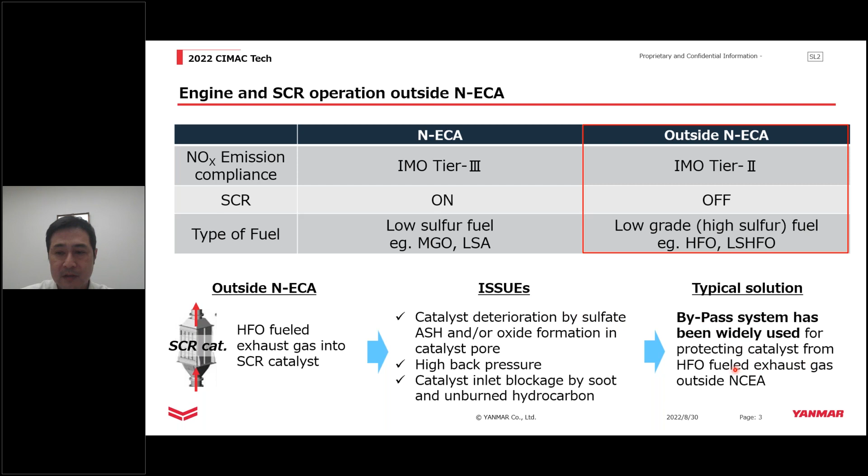If the SCR catalyst is exposed to HFO fuel exhaust gas, the catalyst is deteriorated by sulfate ash and oxide formation in the catalyst pores. In addition, fuel consumption is worsened due to high back pressure. So the typical solution for dealing with this issue, the bypass system, has been widely used for protecting catalysts from HFO exhaust gas outside NECA.

The bypass operation practice requires a way for the exhaust gas to bypass the catalyst reactor. This doubles the amount of piping required, making it more difficult to install in ships with multiple engines. To address this, Yanmar set out to reduce the total system size by making the bypass channels smaller, devising the integrated bypass and catalyst reactor unit shown here.

This makes it possible to make the system more compact while maintaining the advantages of the bypass method, such as long catalyst life, low back pressure, and redundancy.

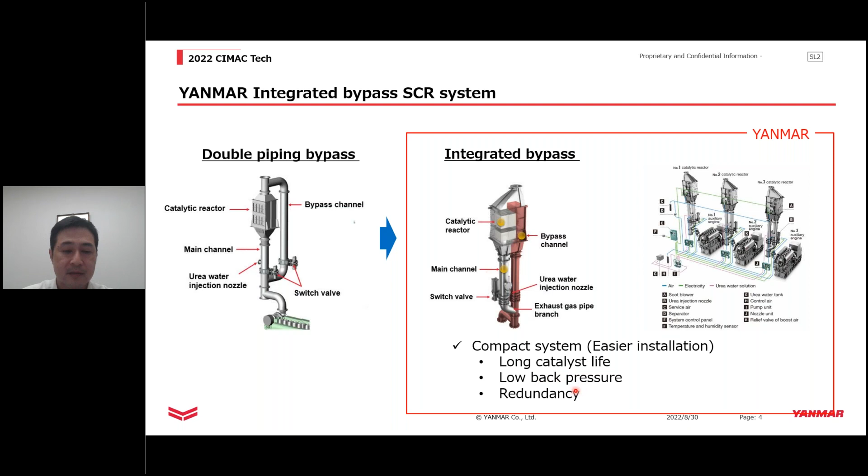However, the SCR catalyst deterioration during bypass operation with integrated SCR system occurred during the development phase. We reported this issue in the CIMAC 2019 paper. However, Yanmar did not report the catalyst deterioration mechanism in detail.

That deterioration was caused by exposure of catalyst to high sulfur HFO exhaust gas under mid or low temperature conditions, around 100 to 200 degrees C, with almost no gas flow. The possible catalyst deterioration mechanisms during bypass operation are three: ammonium bisulfate formation and metal sulfate formation, and corrosion and

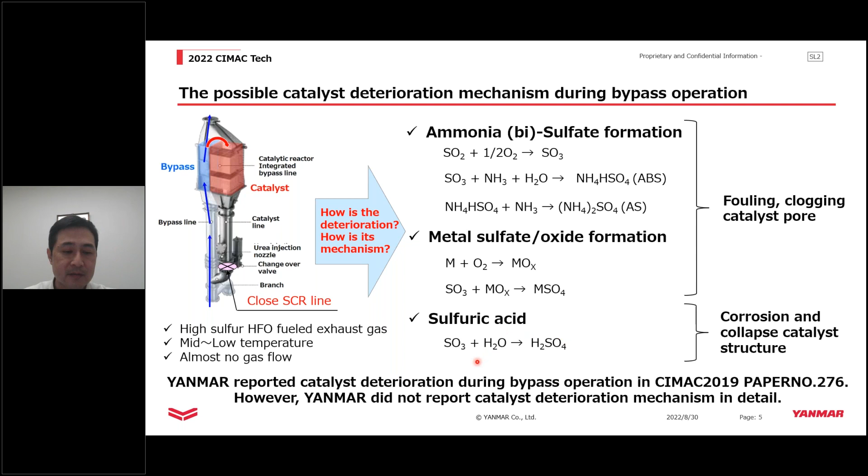collapse of catalyst structure by sulfuric acid. In this presentation, I will present the main root cause of the deterioration during bypass operation in detail.

I will explain the onboard ship test condition. Onboard test was conducted to check catalyst deterioration under actual use bypass condition in an ocean-going vessel auxiliary engine. SCR operations and the tested SCR system are shown here. The engine was started and stopped several times according to ship power generation demand. Fuel for bypass operation was HFO, and the total bypass time was 6 months, with fuel type HFO.

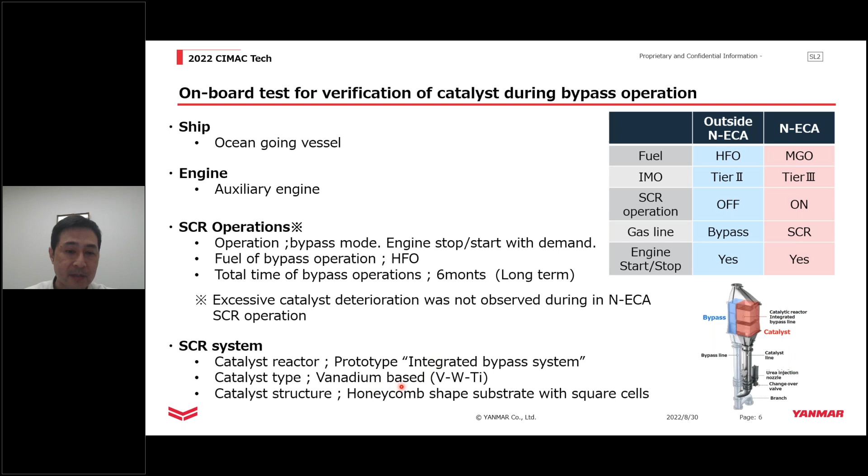The reactor was a prototype integrated bypass system with vanadium-based catalyst, honeycomb-shaped substrate with square cells. The NOx conversion tests were done on small core samples which were picked up from the ship, as shown here. The ship-tested catalysts were installed in 2 layers: the first layer upstream close to the engine, and the second layer downstream. The samples were labeled first upstream, first downstream, second upstream, second downstream, in order from the upstream side closest to the engine.

NOx conversion check was done by the synthetic gas test bench. Here shows a schematic diagram of the synthetic gas test bench. The testing conditions are shown in these tables. The checked samples were 5 samples, including fresh and aged, from 6 months of bypass operation. The synthetic gas test reactor space velocity condition was 30,000 and ammonia ANR was 1.

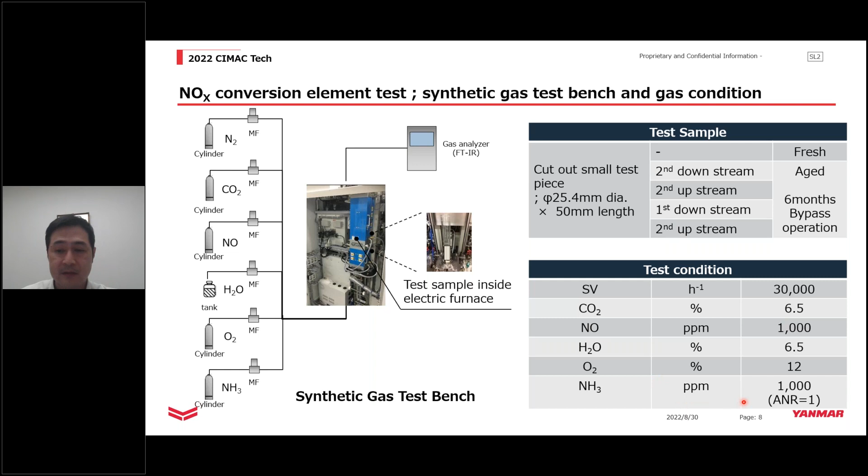Here shows the NOx conversion result. Please see the right-hand side. The vertical axis shows the fresh and aged sample locations from upstream, and the horizontal axis shows the NOx conversion at 200 degrees C and 250 degrees C with ANR1 at space velocity 30,000. Comparing to the fresh catalyst, the second layer NOx conversion was severely deteriorated.

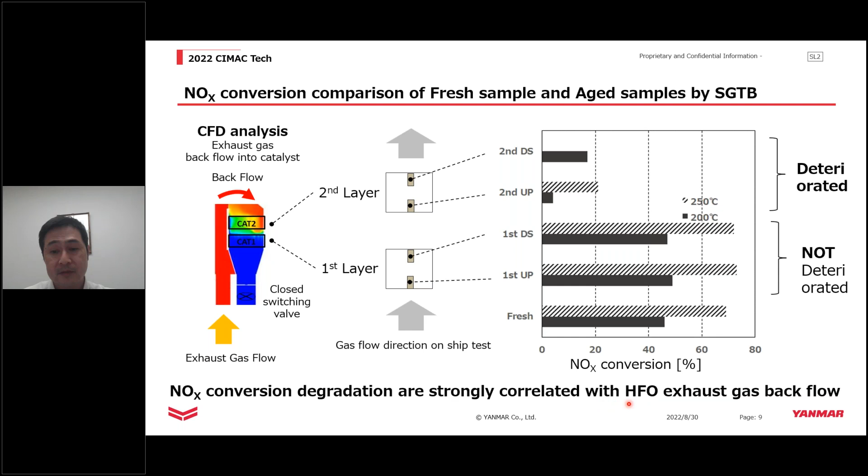On the other hand, the first layer sample was not deteriorated. CFD simulation shows exhaust gas flow backflow in the second layer catalyst. Considering the CFD result, NOx conversion degradation is strongly correlated with HFO exhaust gas backflow.

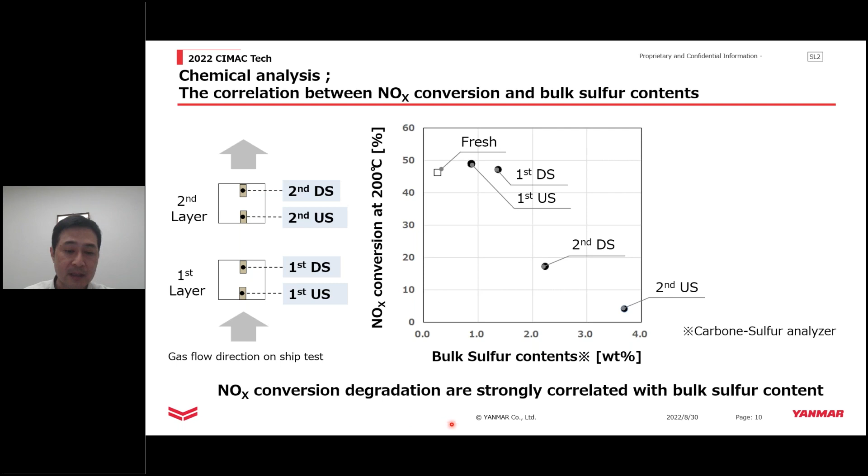In order to check the possibility of ammonium sulfate formation, the amount of ammonia ion adhering to the catalyst was analyzed. Analysis was conducted by ion chromatograph measurement of aqueous solution after washing the sample. The horizontal axis is ammonia ion concentration after water washing. As you can see, there is no correlation between NOx conversion and ammonia ion concentration. This indicates that ammonium sulfate or bisulfate formation is not the main root cause.

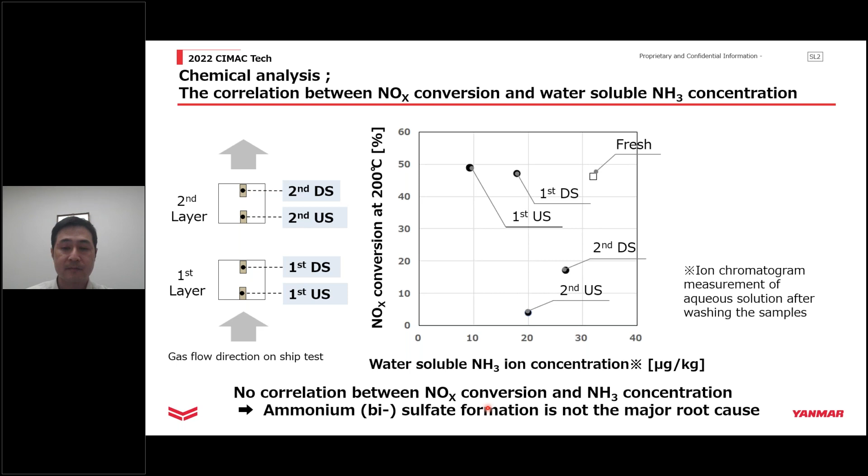Next, adhesive metal components analysis was conducted using FE-EPMA. The vertical axis is the relative difference amount in adhering metal components. If this relative value is greater than 1, it indicates that adhering deposit is increased. Sulfur and oxygen increased, but there was no significant increase of components containing HFO ash such as calcium, silica, and vanadium. From this result, clogging of catalyst pores due to sulfate ash such as calcium sulfate may not be the major root cause.

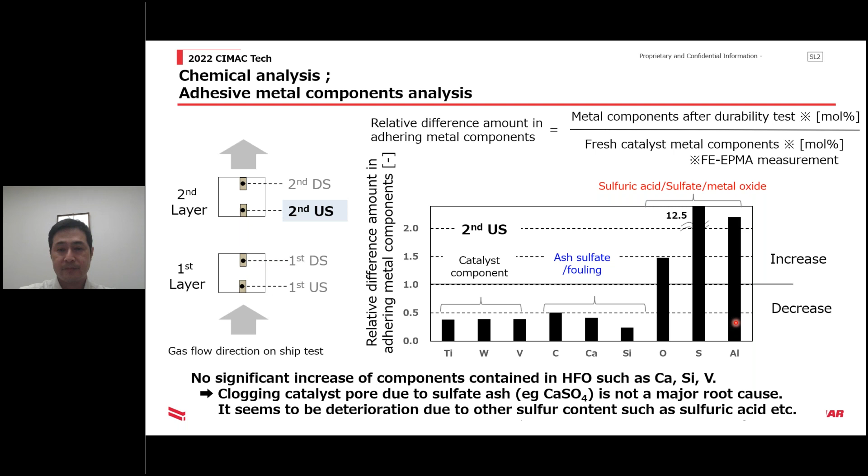Next, the degree of condition difference inside the catalyst was confirmed by FE-EPMA analysis. Here shows the fresh and aged sample vanadium and sulfur. Red color indicates high concentration and blue color is low concentration. The aged catalyst was observed to have relatively smaller vanadium amount near the surface, but the amount of change deep inside is not so large. The near-surface difference is due to the large amount of sulfur adhesion, maybe, and this indicates no big loss of vanadium metal occurred.

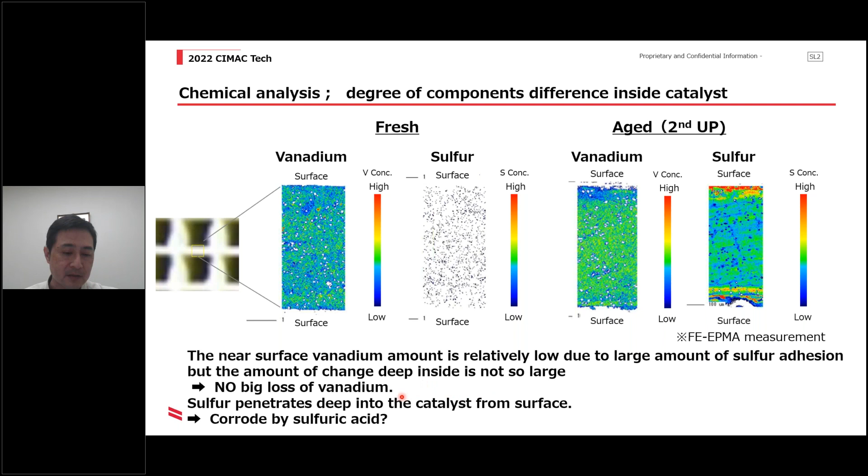On the other hand, sulfur seems to have penetrated deep into the catalyst from the surface, and it looks like there are some cracks in the catalyst. This indicates the possibility that catalyst corrosion had occurred due to sulfuric acid.

Next, a visual inspection check and the corrosion element test were conducted. The left side visual inspection picture shows elution of catalyst components in the insulation mat. Element tests were conducted to determine which sulfuric acid corrodes the catalyst. The left side picture is by diluted sulfuric acid, and the right side picture is by concentrated sulfuric acid. The catalyst was found to corrode when exposed to concentrated sulfuric acid.

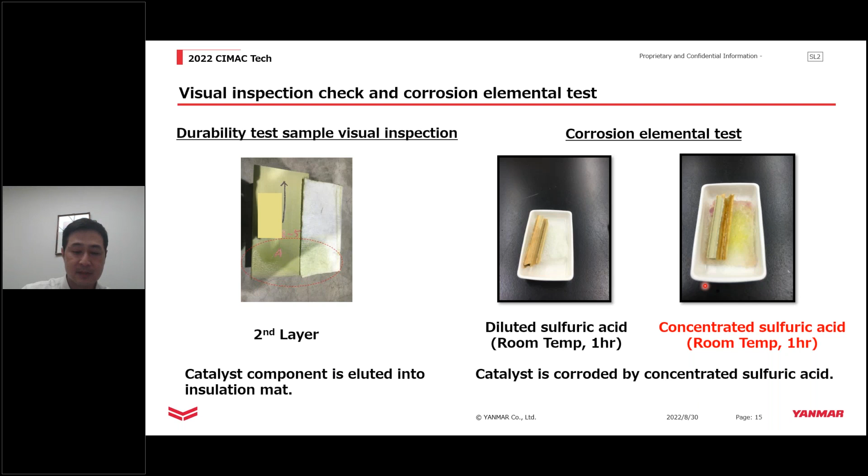Based on this result, the assumed catalyst deterioration mechanism during bypass operation is shown here. Ammonium sulfate formation and metal sulfate and oxide formation are not the major root cause. The corrosion of catalyst by sulfuric acid may be the main root cause.

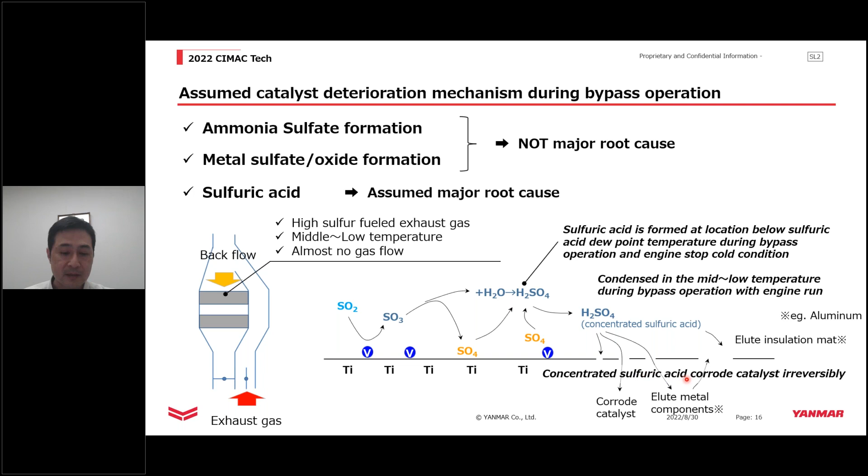The assumed mechanism is as follows. First, sulfur and SO2 is oxidized to SO3 on the vanadium metal. Then sulfuric acid is formed at locations below the sulfuric acid dew point temperature during bypass operation and engine stop condition. The sulfur is then concentrated to concentrated sulfuric acid in mid to low temperature during bypass operation with engine run. Finally, the concentrated sulfuric acid irreversibly corrodes the catalyst and the insulation mat.

Yanmar took countermeasures shown here based on the deterioration and mechanism understanding to prevent the irreversible catalyst deterioration by backflow. The reactor structure was optimized by adding a perforated metal plate to minimize backflow, and the purged air control was optimized to minimize the backflow.

We also optimized periodic valve opening during bypass operation to purge sulfur using exhaust gas heat, preventing concentrated sulfuric acid formation.

So here is our conclusion. In long-term bypass operation with HFO, irreversible catalyst deterioration was observed that caused severe NOx reduction conversion degradation. This was caused by concentrated sulfuric acid corrosion. Yanmar has succeeded in optimizing the bypass integrated reactor structure and controls based on this mechanism understanding.

Yanmar has delivered more than 1,500 SCR units into the market. We think SCR will continue to be an important technology for decarbonized fuel ships. Yanmar will continue to improve our SCR in order to provide customers with the best solutions. So that's all. Thank you very much.

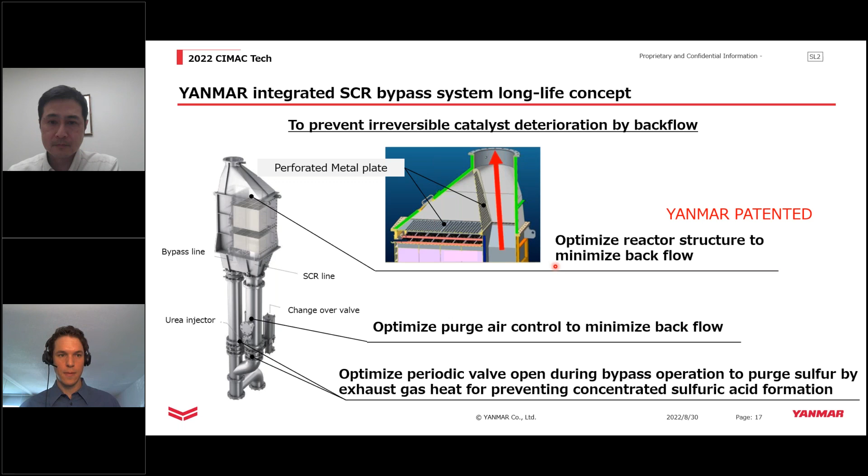Let me confirm your question clearly. So the countermeasures today are perforated metal plates and regular heating of the catalyst. Yes, but did you also consider other measures, such as actually going for an outlet closing valve?

So basically we use perforated metal and optimize the valve control, and sometimes we have the option for a closing valve at the outlet side, depending on the customer's demands.

Okay, thank you, so it is there as an option. Maybe also, as you observed sulfuric acid-induced corrosion of the catalyst, did you also see issues with the reactor itself, as part of the reactor is cold? The steel corrosion? Still, no, we do not see that critical corrosion in our systems in the market.

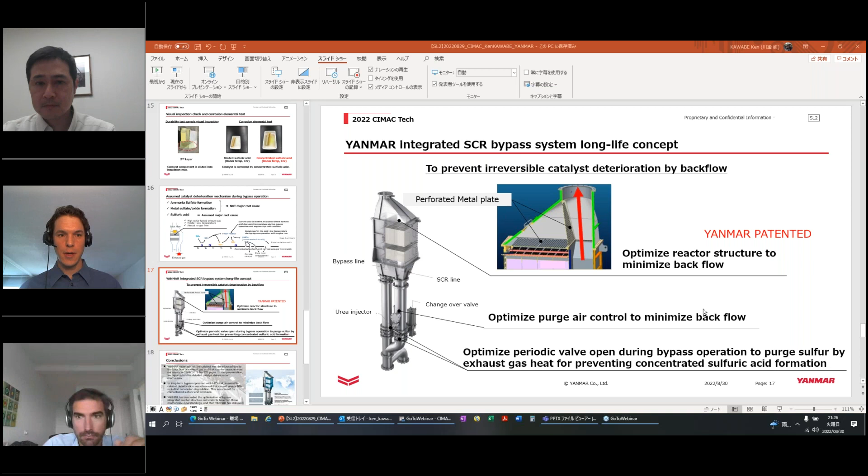So then I would like to move over to our next speaker, which will be Panagiotis Ketatos, and he will be presenting the concept of advanced SCR control by utilizing virtual sensor concepts, where the state of the SCR catalyst can be fed back also to the engine operation. And this very advanced and promising SCR and engine control system has been investigated together with the Paul Scherrer Institute as an academic institute. I would like to give the stage to Panos, please.

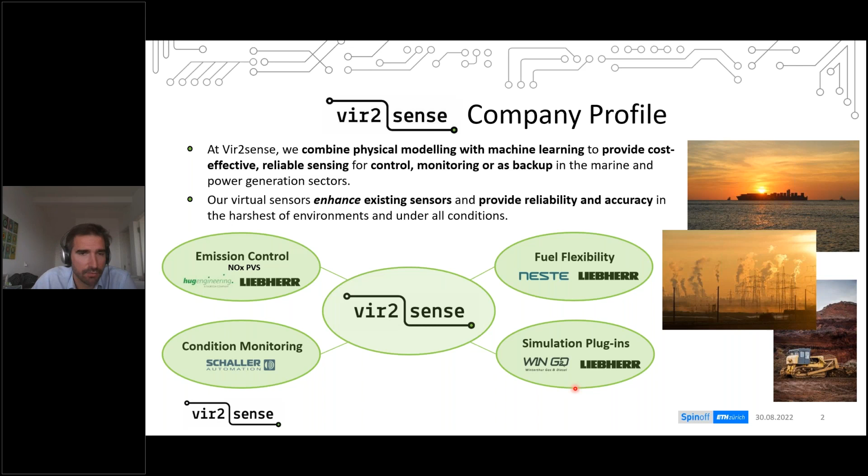Looking into fuel flexibility and controls for fuel flexible engines, condition monitoring of components on the engines, and providing simulation plugins for engine design and optimization. So this was a brief overview, and jumping directly into the main content.

So to introduce a bit the problem that we're trying to solve with this project: most modern engine installations require an SCR catalyst to reduce engine-out NOx emissions in order to comply with environmental regulations, which are becoming ever stricter. The SCR system is a very effective way to lower NOx emissions, and it can typically lower well above 90% of the engine-out NOx emissions in the after-treatment, using precise dosing of a reducing agent, typically urea, which is converted into ammonia in the catalyst and in the exhaust.

So traditionally in all marine and many stationary applications, the control of the urea dosing is based on what we call a static map, which is a map of dosing of ammonia or urea depending on engine speed and load. Although this is a very simple and well-trusted system, it's very effective, and it's also easy to check for compliance. The downside is that when using such a system, it's not necessary that engine and SCR are very well optimized together.

This can also have very bad effects during the transient operation of the engine, where jumps in NOx emissions or temperature can lead to high slip of ammonia or high NOx peaks in the exhaust. A typical example of how this is bad is in marine applications, where typically the engine will be a tier 2 engine, specifically optimized to not run with an SCR system. We then couple it with an SCR system to make it a tier 3 engine, whereby the NOx reduction required is closer to 60%, far below the capacity of the SCR. So we lose the capability to optimize the two together, which leads to excess fuel consumption, since the engine is detuned from its optimal point in order to achieve tier 2 by itself.

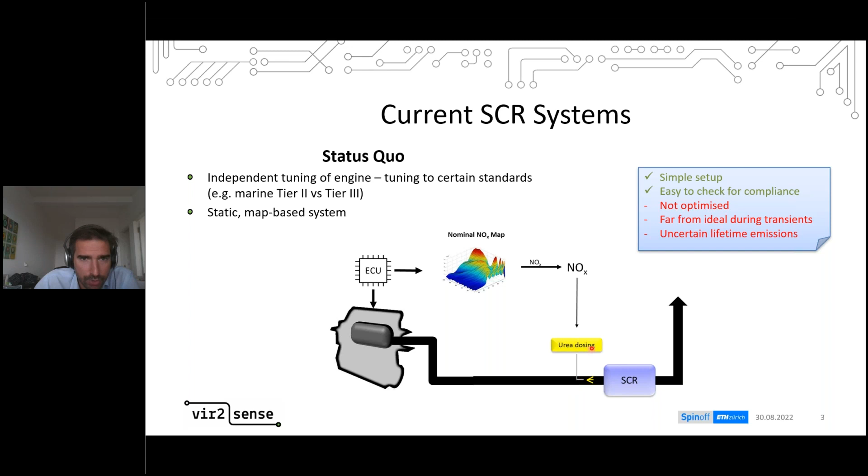So how are we trying to solve this? In this project, we try to explore the capabilities of combined fuel consumption and emission reduction using a combined SCR engine control system. The final result is what we call intelligent SCR, and it involves two parts. One is the optimization of the engine to be matched to a specific catalyst. The second part is the active control of the maps on the engine in order to fit the operation of the real-time state of the engine and the SCR, to reduce any peaks that might arise because of inability to match the operation of the engine to the state of the SCR at any given point.

What we aim to achieve with this overall intelligent SCR system is three things: overall emission reduction, including CO2 and NOx emissions - that is, reduce fuel consumption and reduce NOx emissions - and be able to effectively use either smaller catalysts with the same or even better effectiveness than a bigger catalyst using intelligent control systems, or also use a less reactive catalyst. So these are the goals, and I will show you in the end how we did on this.

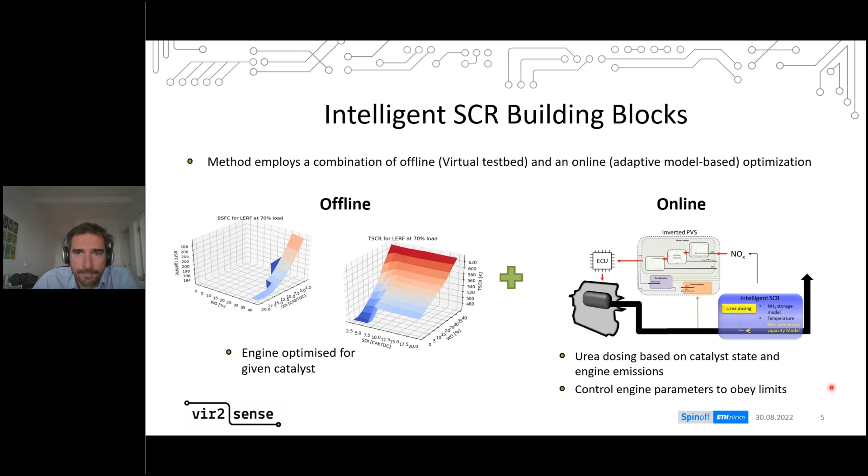For the engine part, we built a full digital twin of the engine using thermochemical models and artificial intelligence, mostly for the modeling of the turbocharger and the wastegate system.

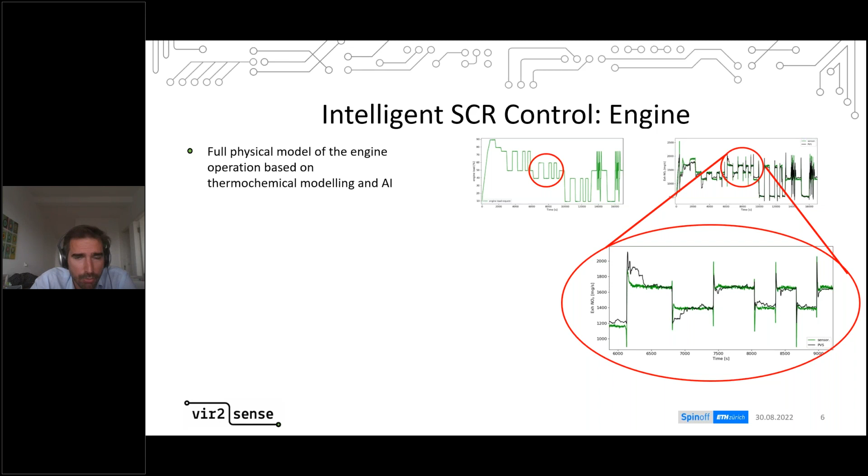For the second part, for the continuous monitoring required for the engine-out emissions in order to control the SCR, we use the Vir2sense NOx PVS, a physically assisted virtual sensor which combines the advantages of a physical sensor mounted in the exhaust and a virtual sensor running in a computer separately. During continuous operation of the engine, the virtual sensor provides a continuous NOx value, so we always have an expected NOx value from the engine, and a physical sensor, protected from the exhaust gases, samples intermittently in order to retune the virtual sensor to always have an accurate output. So we have both advantages of the virtual and physical sensor: the unlimited reliability of the virtual sensor and the accuracy from the physical sensor.

Overall, we have seen that this leads to a superior lifetime of the overall sensor compared to other systems. Typically, zirconia-based sensors in the exhaust with high sulfur fuel will last a few tens or hundreds of hours, and with our system we can extend that to a few thousand hours. So this is a big advantage.

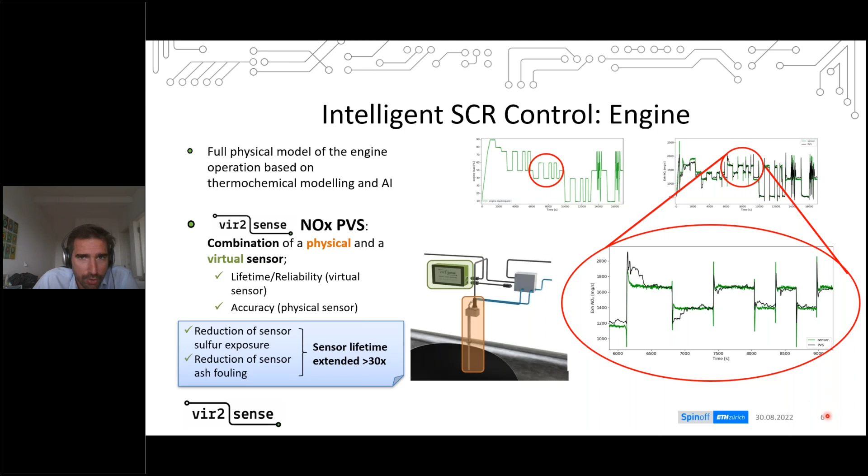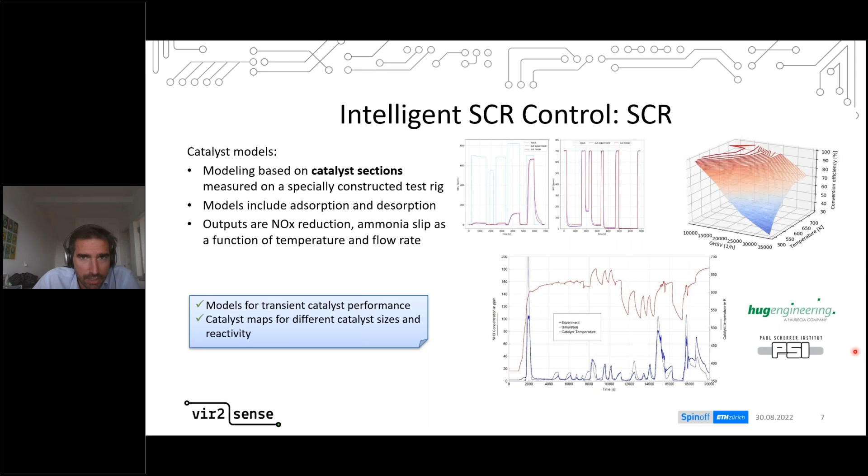And finally, to show you the test facility that we tested everything in. All the systems were tested on a large engine research facility at the Paul Scherrer Institute in Switzerland. The facility houses a 1 megawatt medium speed common rail diesel engine with a prototype 2-stage turbocharging system.

The facility has an adapted ECU in order to be able to actively change parameters. In this circumstance, we were changing start of injection to adapt the NOx fuel consumption trade-off, and the wastegate to mostly adapt peak pressure, exhaust temperature, and exhaust flow rate.

The engine and all the systems, the SCR, were tested using a standardized cycle that we created, which has specific characteristics. The cycle, you can see it here, lasts around 5 hours, and has a first section of constant loads where everything is stabilized in order to mimic stationary and marine applications. Then we have some step responses where very fast and rapid changes in load happen from one load to another in order to test the reaction of the catalyst and all the control systems.

And finally, we have a transient area where we effectively mimic the distributed power generation sector, where we have sudden load changes to follow the grid production and demand.

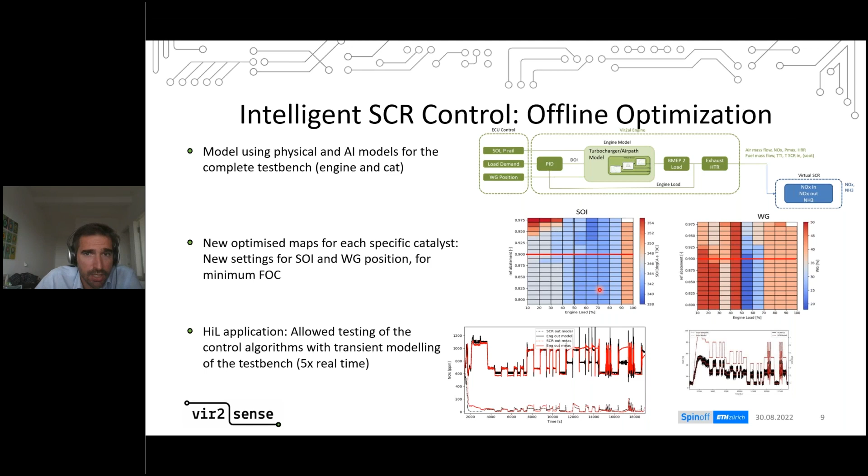We could also use this system in a hardware in the loop application to test all the algorithms that we were producing for the controls. And finally, once the offline optimization was completed and the specific maps for each specific catalyst-engine combination were available, we were also able to test the online optimization on the engine.

The online optimization essentially uses the offline maps, but also has online control loops to adapt the engine and SCR parameter maps and correct their settings by taking into account the current state of the engine and the catalyst.

As an example, we can use the cold start. During cold start, the temperature of the catalyst is low and increasing. This leads to low conversion efficiency and ammonia desorption from the increase in temperature. So during this time, the engine controller will increase the engine out NOx emissions in order to consume the desorbed ammonia, while also the SCR will limit the urea injection. So this is an effective use of this.

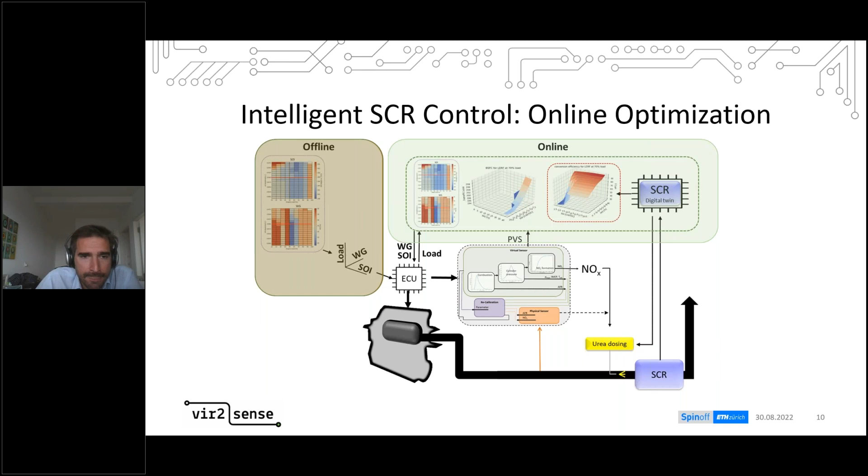And to close, to show you some results from the overall procedure and what we accomplished: we used 3 different catalysts to test the setup. The first catalyst was what we used also for the reference, and it was tested first with the standard setup of using a map effectively as a normal feed forward for the NOx and urea dosing.

And with this setup, we set it from the tier 2 engine settings to achieve 90% reduction in raw NOx, and the result was 0.46 grams per kilowatt hour of NOx after the SCR for the whole cycle, average over the whole cycle, and 6.5 ppm of ammonia slip.

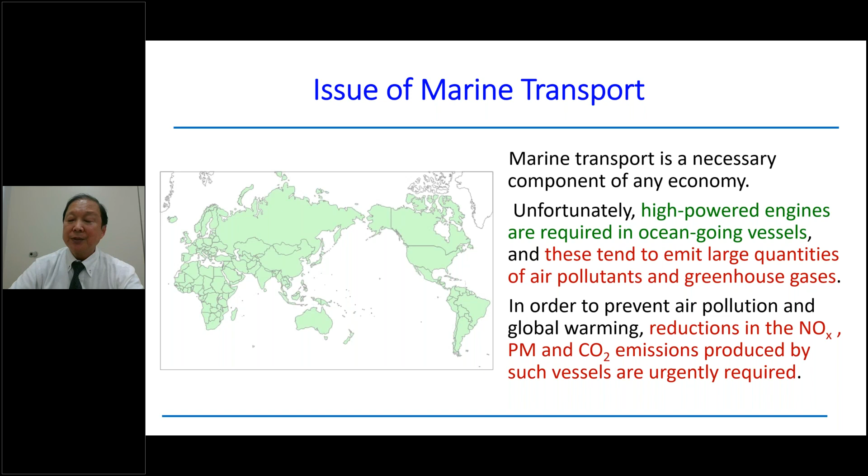Marine transport is a necessary component of any economy. Unfortunately, high-powered engines are required in ocean-going vessels, and these tend to emit large quantities of air pollutants and greenhouse gases. In order to prevent air pollution and global warming, reductions in the NOx, PM, and CO2 emissions produced by such vessels are urgently required.

Because the ice in the Arctic Ocean decreases due to global warming, the Arctic sea route is under consideration. If this is realized, the distance between East Asia and Europe will be 30% to 40% shorter, and the risk of present sea routes are reduced. For example, the risk of pirates in the Strait of Malacca, pirate risk off the coast of Somalia, and risk of travel in the Suez Canal.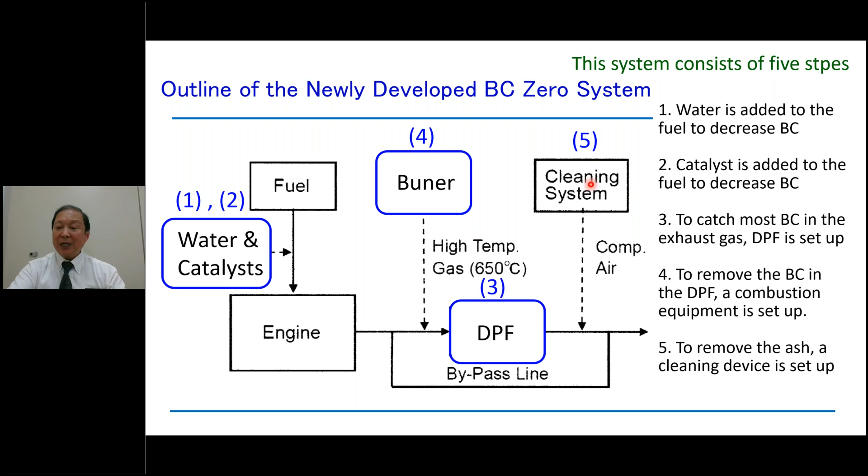This figure shows the outline of the newly developed black carbon zero system. This system consists of 5 steps. First step, water is added to the fuel to decrease black carbon. Second step, catalyst is added to the fuel to decrease black carbon. Third step, to catch most black carbon in the exhaust gas, a DPF is set up. Fourth step, to remove the black carbon in the DPF, a combustion equipment is set up. Last step, to remove the ash, a cleaning device is set up.

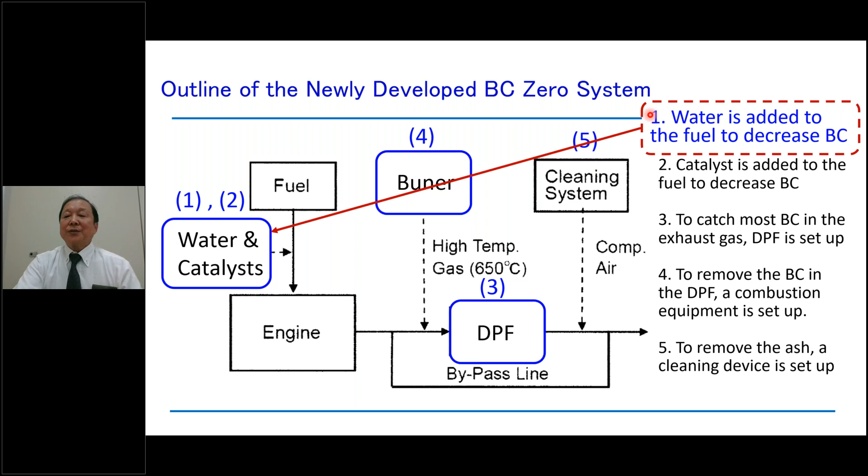First of all, I'll explain the first step. Water is added to the fuel to decrease black carbon generation in the combustion chamber during the first combustion process.

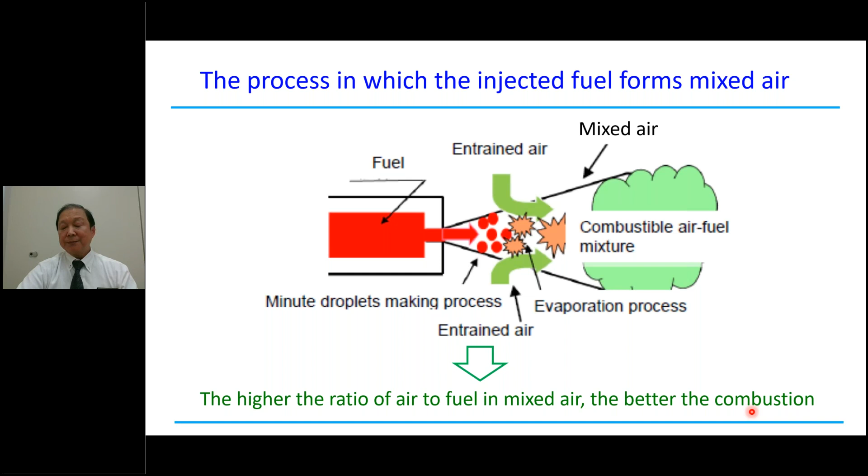This figure shows the process in which the injected fuel forms mixed air with entrained air. The higher the ratio of air to fuel in mixed air, the better the combustion. To be more specific, in the case of fuel only, the entrained air corresponding to the fuel will be introduced. In the case of fuel with water, the amount of injection, meaning fuel and water, increases as much as the water is mixed. The more the injection increases, the more the entrained air. As a result, combustion is improved by increasing entrained air against fuel.

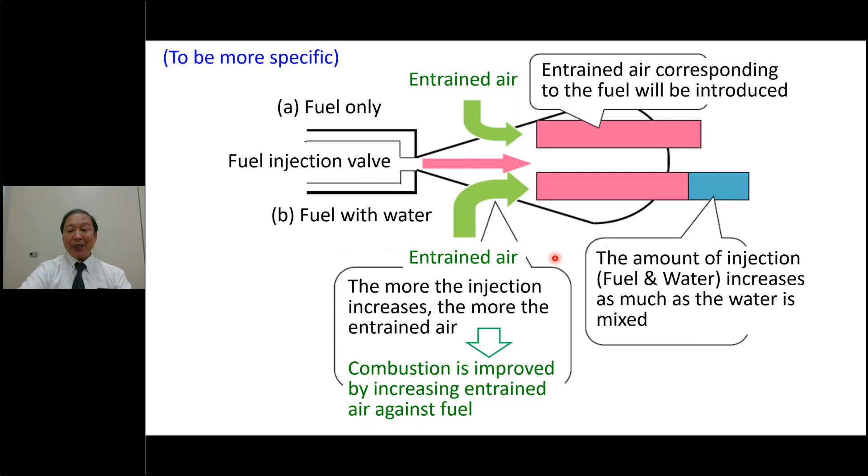This figure shows the PM reduction effect of water-mixed fuel. Adding a ratio of 15% water to the total fuel can decrease black carbon generation by about 60%. So 15% water decreases soot by 60%. Soot means black carbon.

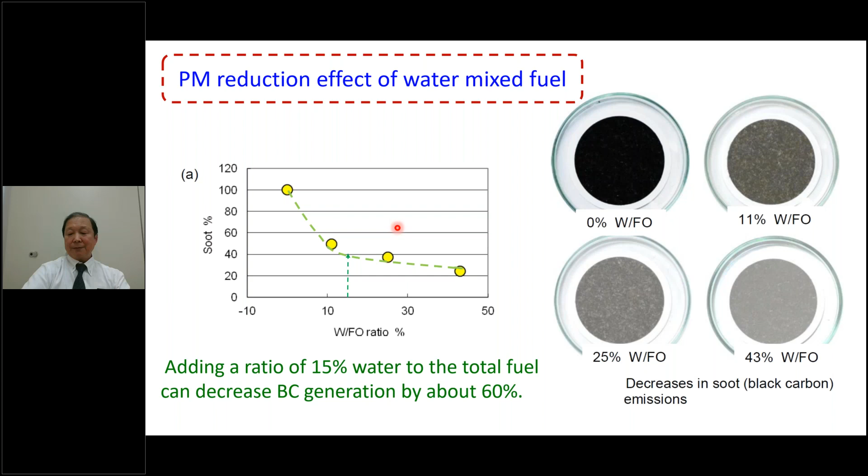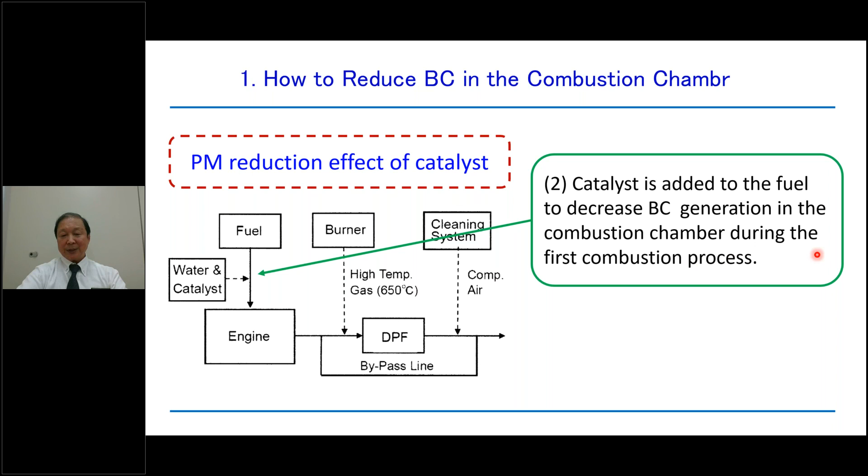This figure shows the outline of the second stage. Catalyst is added to the fuel to decrease black carbon generation in the combustion chamber during the first combustion process. This figure shows that adding a CeO2 catalyst to the fuel can decrease black carbon generation by about 20%.

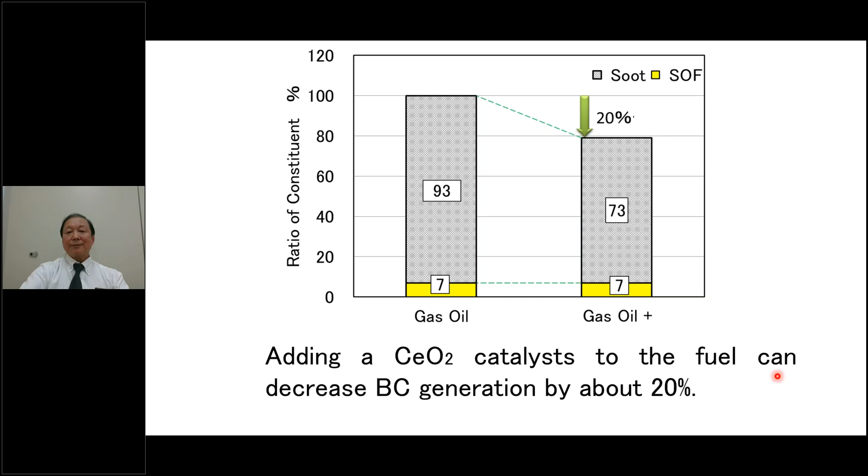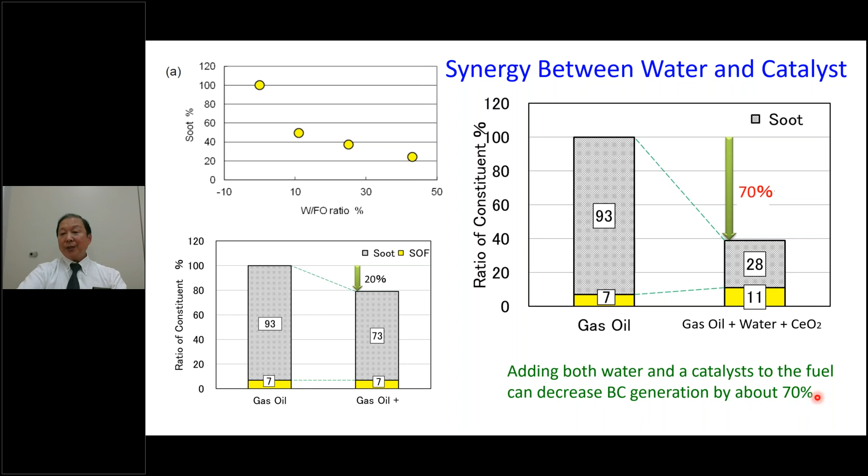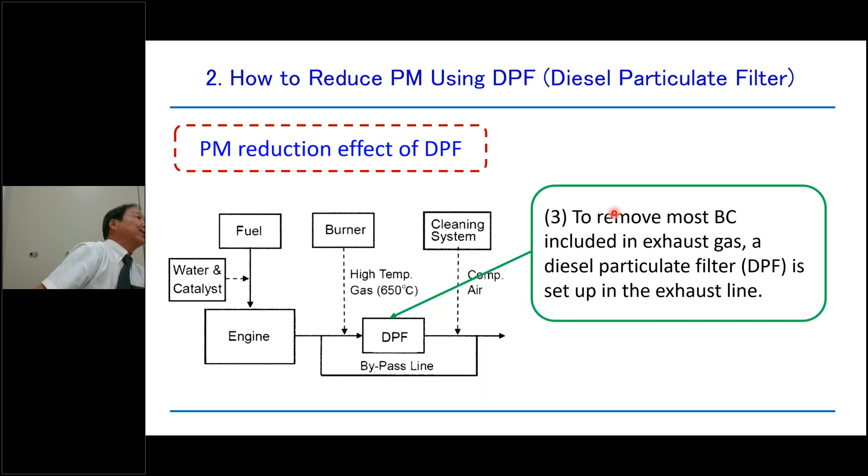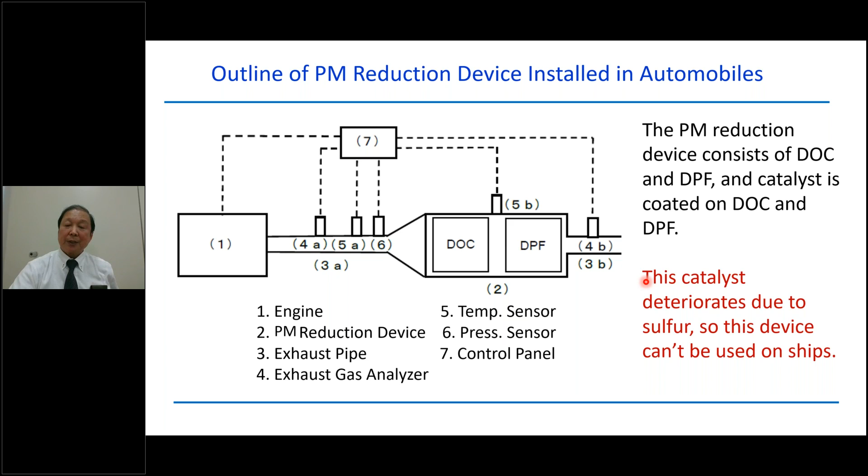Third, I'll explain how to remove most black carbon: a DPF is set up in the exhaust line. To remove most black carbon, included in exhaust gas, a diesel particulate filter, DPF, is set up in the exhaust line. This figure shows the outline of the PM reduction device installed in automobiles. The PM reduction device consists of DOC and DPF, and catalyst is coated on DOC and DPF. This catalyst deteriorates due to sulfur, so this device can't be used on ships. For this reason, only DPF is equipped in the exhaust pipe on ships, and all PM contained in the exhaust gas is caught by this DPF.

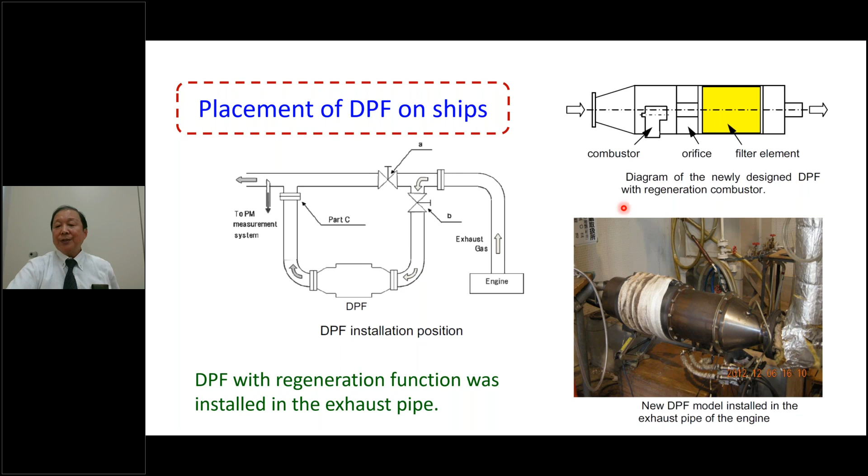This figure shows placement of DPF on ships. This is the engine, DPF, and the bypass line. A DPF with a regeneration function was installed in the exhaust pipe. This is a diagram of the newly designed DPF with regeneration combustor. This is the combustor. Most of the remaining black carbon can be removed by setting up a DPF in the exhaust line. This shows soot, meaning black carbon, without DPF and with DPF.

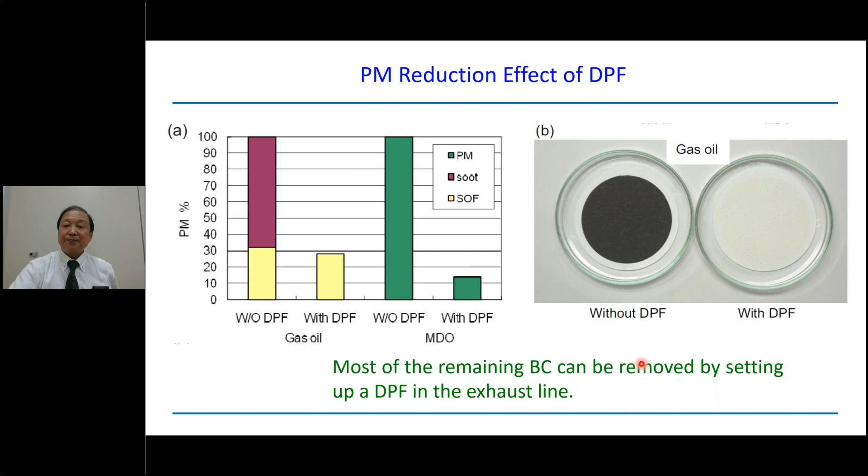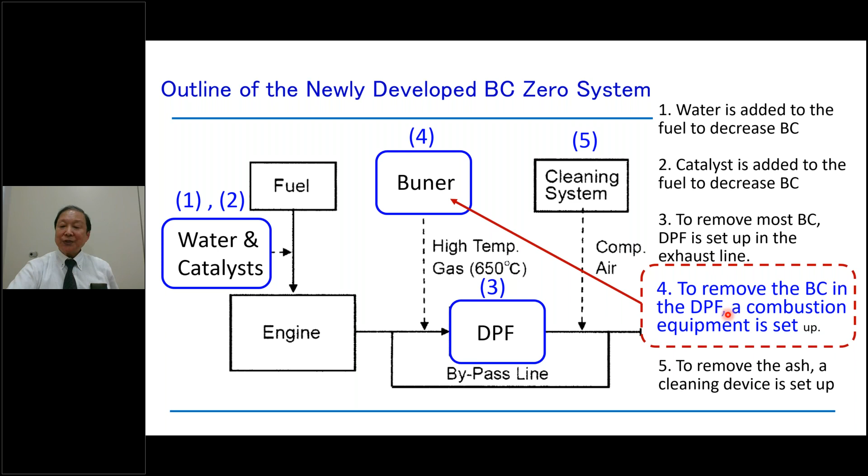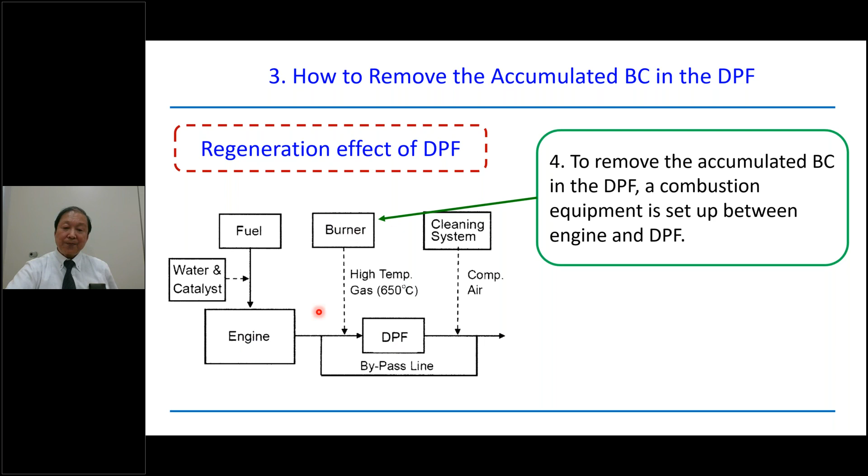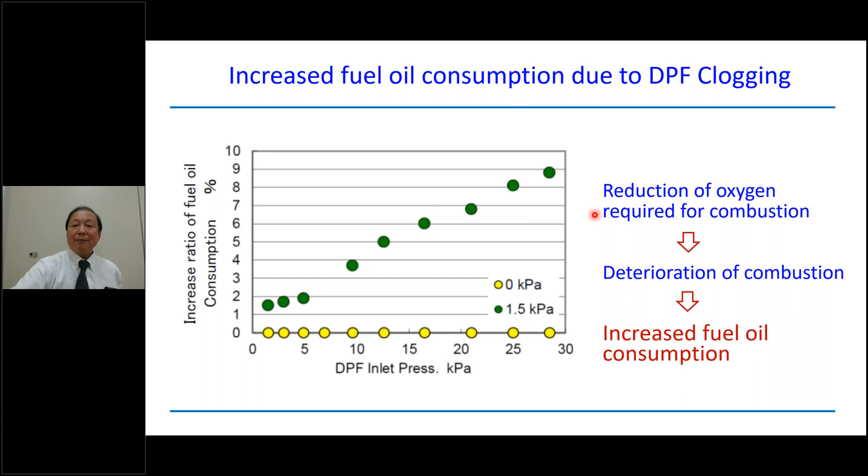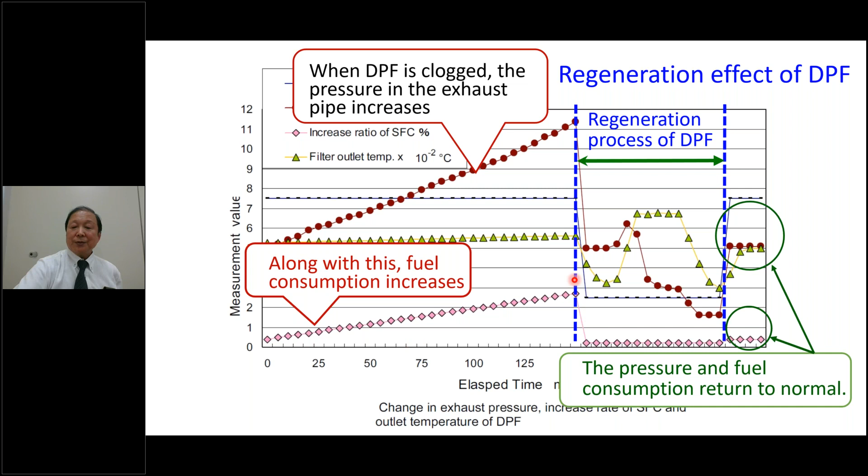Most of the black carbon accumulation in the DPF can be removed and burned in separate combustion.

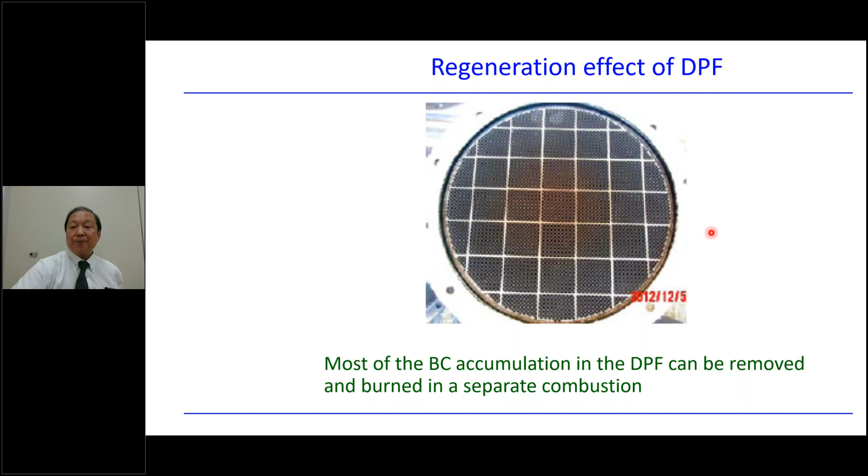The effectiveness of this system was evaluated, and the following points were clarified. First, adding a ratio of 15% water to the total fuel can decrease black carbon generation by about 60%. Second, adding both water and catalyst to the fuel can decrease black carbon generation by about 70%. Third, most of the remaining black carbon can be removed by setting up a DPF in the exhaust line. Fourth, most of the black carbon accumulation in the DPF can be removed and burned in a separate combustion apparatus set up between the engine and the DPF.

Creation of a device that will remove the ash generated during the second combustion process is in an advanced development stage.

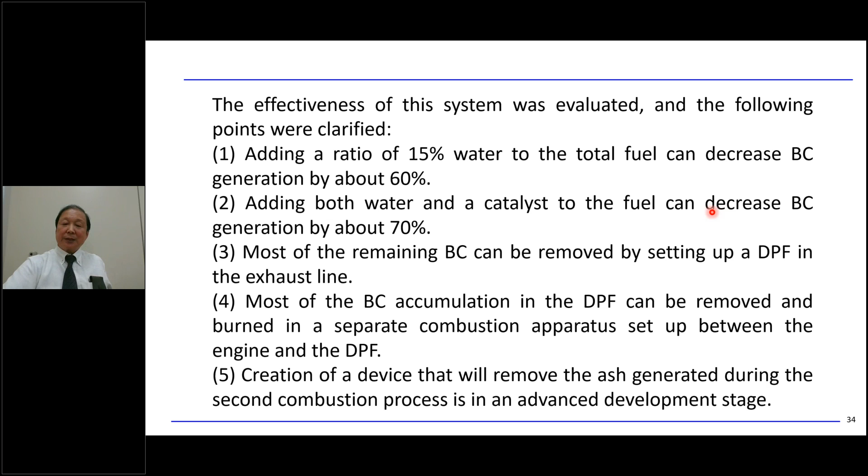Conclusions. Our proposed system has potential to reduce black carbon emissions from marine diesel engines to close to zero. Furthermore, since the global environment will not return to its original condition, even if it only deteriorates by a slight degree, we believe that all technical solutions, such as our proposal, that can minimize or eliminate further deterioration should be used to their maximum potential. Thank you for your attention.

Thank you very much. And actually, we have already one question in the chat, which is about the fuel penalty to clean the DPF at 650 centigrade with the burner periodically. Yes, can you comment on this?

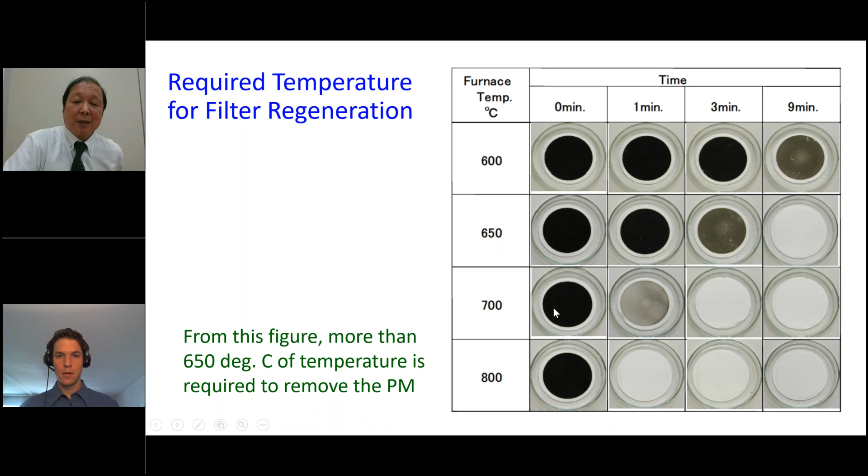Yes. Do you have a number for how much extra fuel is required for heating the DPF? Heat? Okay, the energy consumption for heating. Oh, energy consumption, yes. To reach the temperature, the combustor is used. Yep, energy consumption.

Otherwise, if you cannot comment right now on this question, we try to solve it afterwards. Yes, yes, that's okay. So thank you.

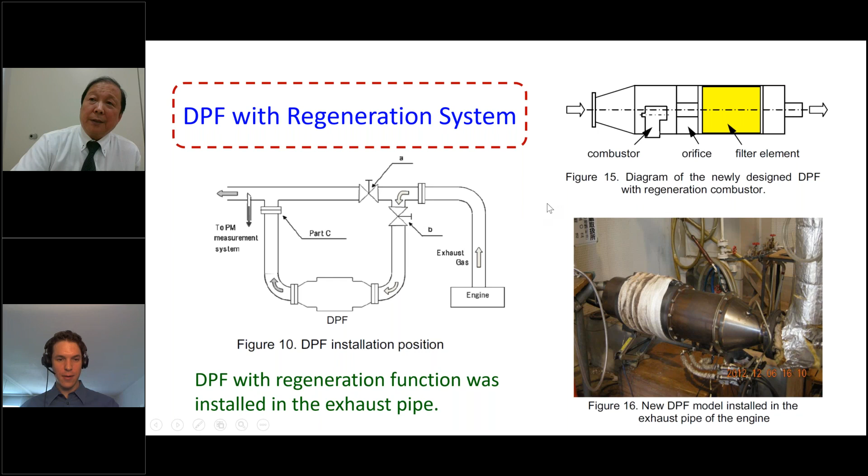The system is for regeneration, as you show on this slide, number 31. You show there is a valve closing the DPF. Slide number 31, yes, this one. Yes, so element B is element, a valve, on the left-hand side. The left figure, the piping figure. This filter element is the automobile's filter element type. Okay, thank you. On the other picture you have there with the cursor on the left.

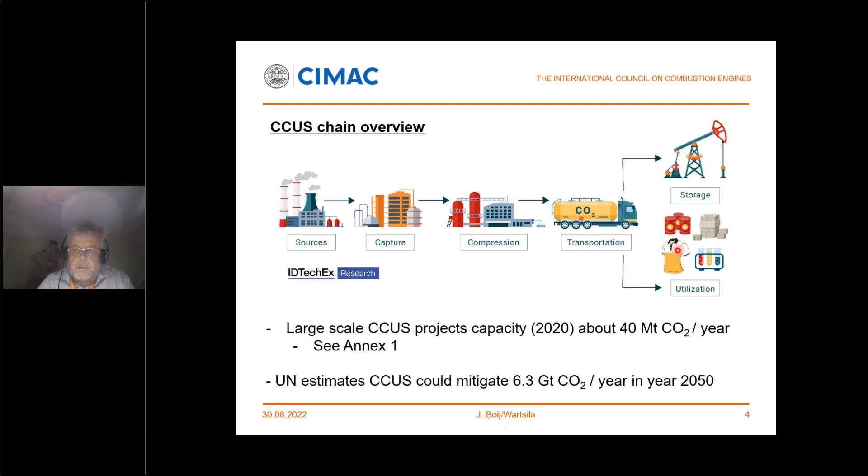I said that by year 2050 we should need to reduce about 6.3 gigatons per year, and we need to increase the fleet of existing or new CCUS installations. Now take a look at year 2020: operating, under construction, advanced development, and announced projects in year 2020 was about 90 projects, but already in year 2021 the total amount had increased to 190. This is still accelerating, because I read a few days ago in a magazine that in Q2 of this year...

the planned global carbon capture, utilization and storage capacity pipeline had already reached 905 million tons per year. That's something, 905, because the current capture rate is only 40 megatons per year at the moment. It will increase in the future. And what is the reason for this big interest then?

It's of course to meet these national, regional, corporate net zero goals. Then the other is blue hydrogen production or low carbon hydrogen production. About 50 facilities are under development. And then investment incentives. Let's talk about two of these.

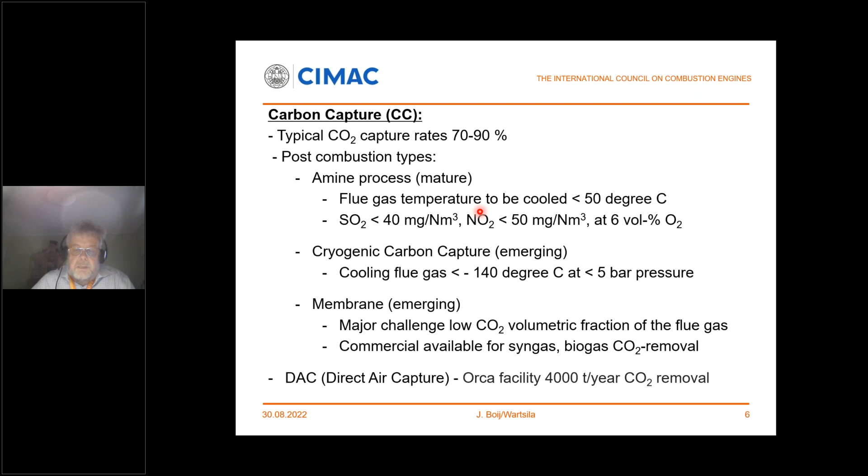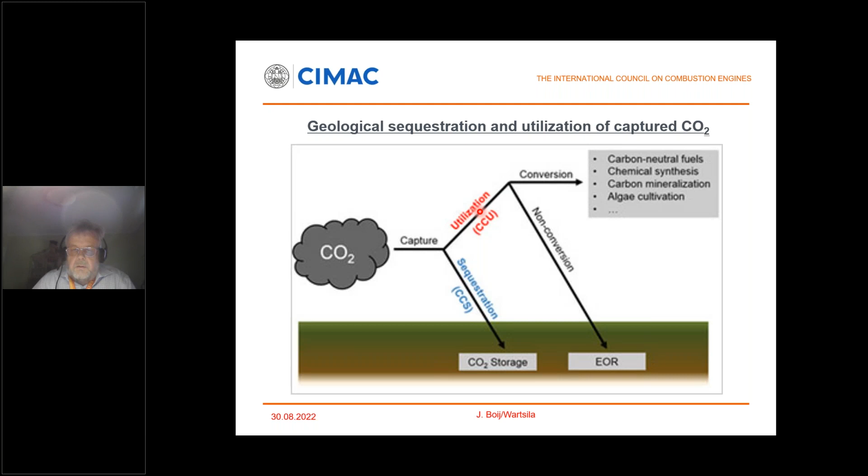Here you see this big potential with this utilization of captured CO2, but as I said, it needs to be clean. Nowadays, every year 230 million tons of carbon dioxide is used, most of it for fertilizer, 130 million tons per year, and enhanced oil recovery up to 80 million tons per year.

Then in the Orca facility in Iceland, they use mineral carbonation. That means magnesium and calcium silicates react with CO2 and carbonates are formed. In the Orca plant, this captured CO2 is mixed with water and injected into the ground, where it reacts with the rock, and carbonates are formed. But this reaction is not fast, it takes 2 years.

Then the third one, geological sequestration. There we store this CO2 underground in depleted oil and gas reservoirs, well below the ground. It can be 1 kilometer or several kilometers below the ground. CO2 is compressed to about 100 bar pressure before it's injected. When talking about geological sequestration, it's very important to know the reservoir, because it needs to have high porosity and permeability. If it's consisting of sandstone or limestone, it's ideal.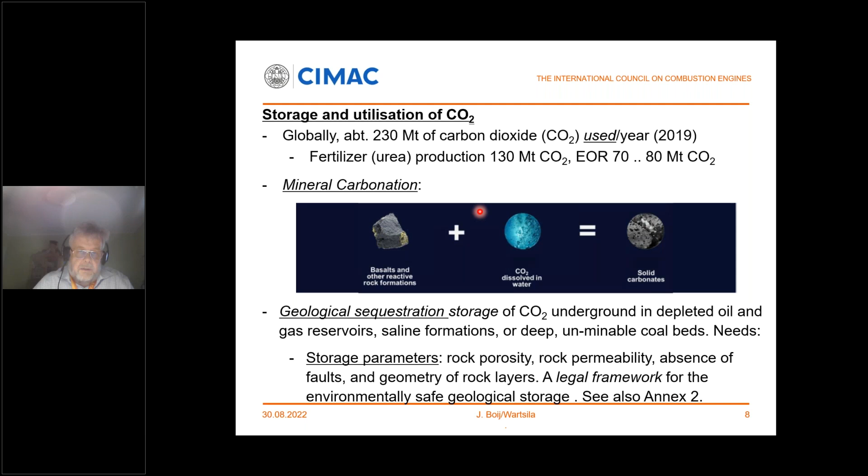Next slide. Then if we talk about the power industry nowadays, the dynamics are very important. If we increase the penetration of renewable energy sources, the challenges for grid operators to maintain electric reliability will arise due to the intermittency of wind and solar power, because if there is no wind, there is no wind power electricity. If there is no solar, there is no solar power electricity at night, for instance. Therefore, thermal power plants are needed for grid stabilization. And if you operate these at part loads, their efficiency is not the best, and they emit more CO2 emissions and consume more fuel.

Therefore, power operators, such as American ones - ERCOT, for instance - they prefer non-spinning reserve plants. It means plants that can start very fast and be synchronized to the net and start to produce power at full load, and that should happen within 10 minutes.

Now from the literature, can also be found some data about the dynamics of this amine carbon capture process. In Annex 3 here are numbers for a boiler and combined cycle gas turbine plant equipped with this amine carbon capture system, and a typical hot startup time is around 1 to 2 hours, which is much longer than 10 minutes - it's too long. For instance, a gas-fired engine can start up within 2 to 10 minutes, reach full load and produce electricity, depending on the engine type. This means that this carbon capture technology is more suited for baseload plants such as a cement factory or a chemical plant.

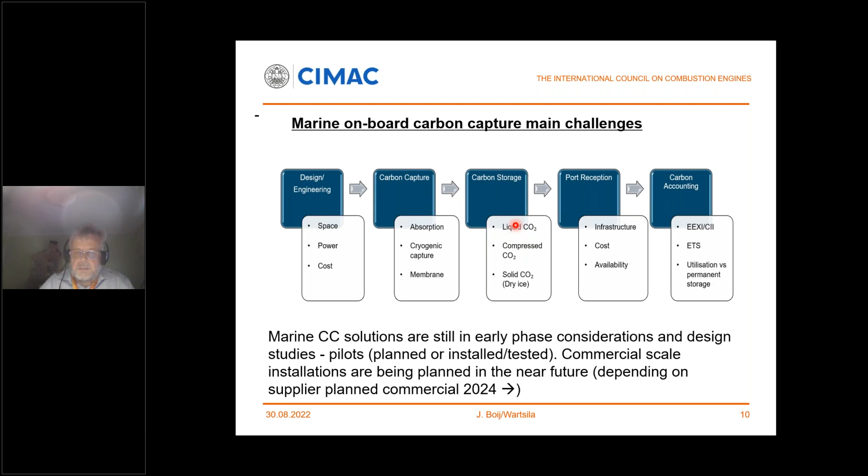One word more about this carbon storage: if you burn 1 ton of oil, you will get about 3 tons of removed CO2. This is really critical, that this needs to be compact.

Then a few words about the technology readiness of this technology. This is from a source that was issued in year 2020, already 2 years ago.

CO2 capture in power generation: if you talk about a coal-fired power plant, it's in an early adaptation phase. Some scale up still needs to be done, and then it's matured - it's almost already there.

For natural gas, containing less CO2 concentration compared to flue gas from a coal-fired plant, there is still more work to do because this is only in the demonstration phase, that more testing is needed.

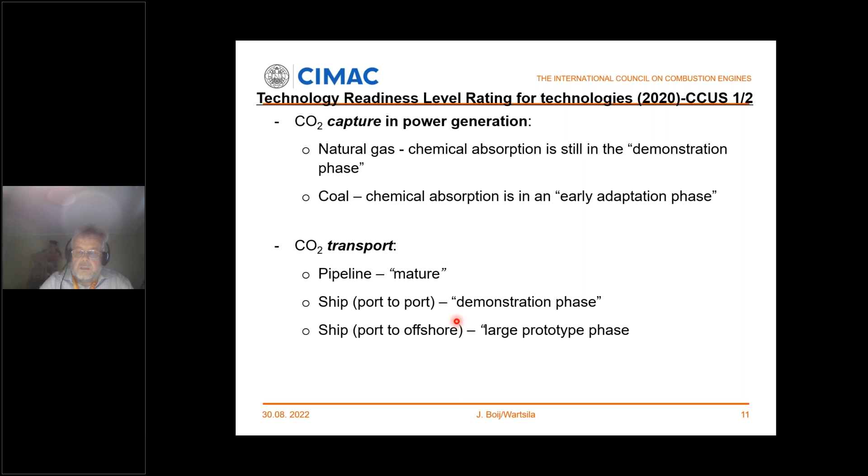Then regarding transport, pipeline is mature, and ship port to port is in a demonstration phase - some more testing needs to be done. Then ship port offshore is only in the large prototype phase - a lot more work needs to be done.

Then about the storage, enhanced oil recovery is mature, and saline formation is in early adaptation phase, or starts to be almost matured also. Then regarding depleted oil and gas reservoirs, only in the demonstration phase at the moment.

Then for CO2 usage, urea is mature, concrete is early adaptation phase, synthetic methane is demonstration phase, and synthetic liquid hydrocarbons is large prototype phase. A lot of development still needs to be done.

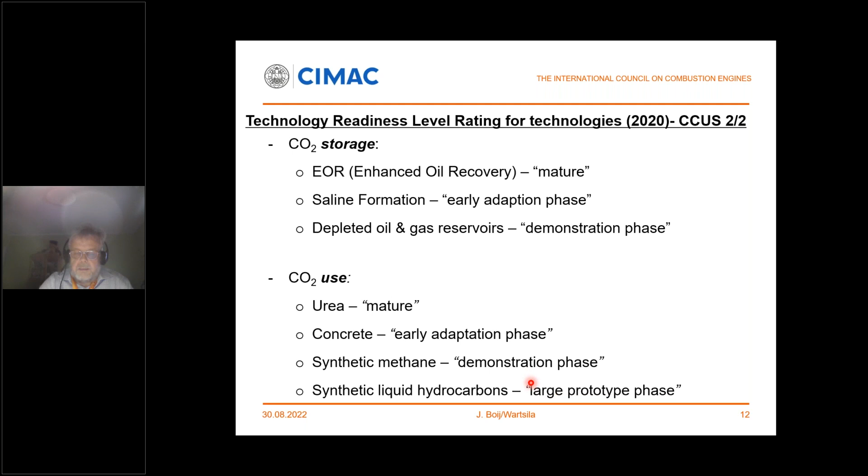I'll show these annexes very fast. Here is Annex 1 with large-scale commercial carbon capture utilization storage projects in year 2020. In this list are 21 installations, and the big plant here, if it's a coal-fired power plant, reduces a minimum of 0.8 million tons per year, and if it's some other process, it's minimum 0.4 million tons per year.

You can see most of these are for enhanced oil recovery, and then for some it is dedicated, meaning they store it in the ground.

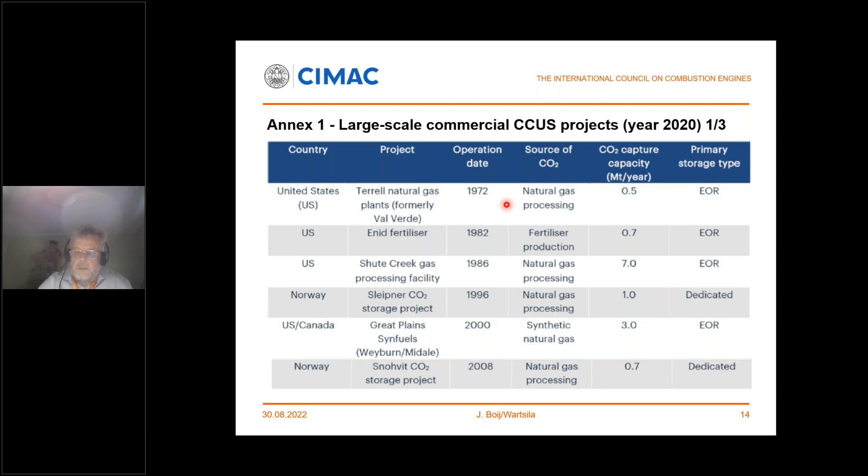Here you see the dynamics of this amine carbon capture system, for a natural gas combined cycle. Without carbon capture, hot startup time is 45 to 55 minutes. Nowadays, if optimized, they can do it in around 30-35 minutes. This is quite a long time.

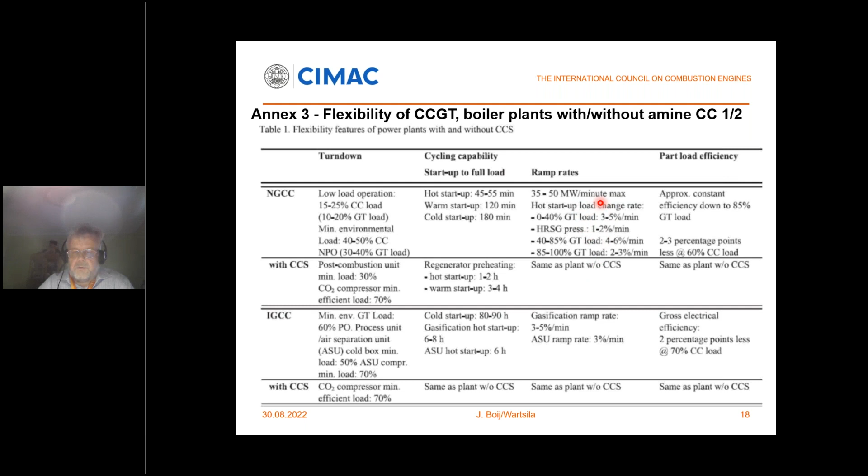But if you connect the carbon capture system, hot startup time increases to 1 to 2 hours. This is a slow system to start up. But take a look at the ramp rates - the carbon capture system is as fast as the combined cycle gas turbine. It's fast when it's operating, but it takes time when you start it up.

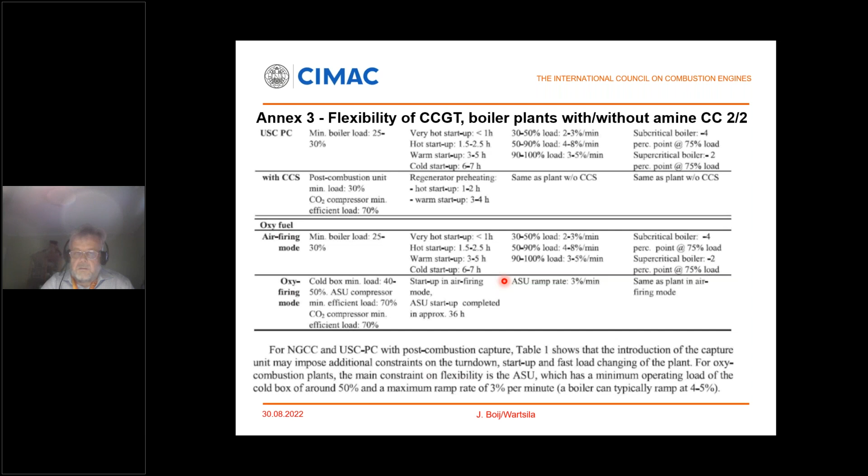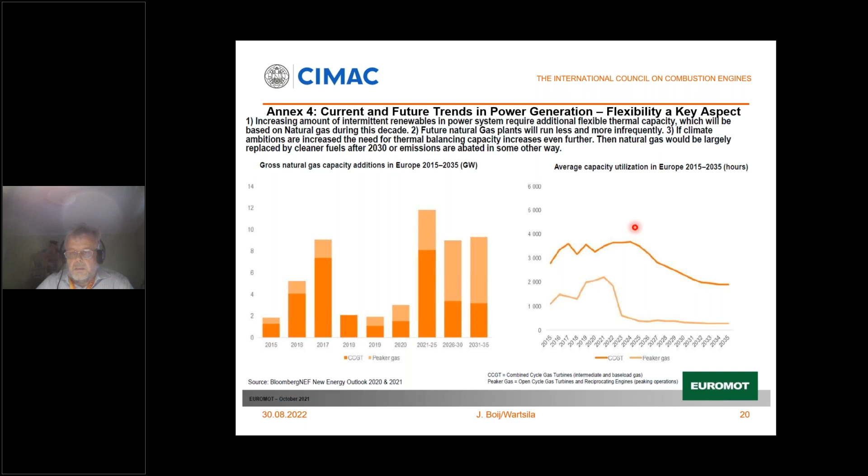This was my last slide, so I'll stop now.

Thank you, Johan, for sharing your expert view on the topic of carbon capture, utilization and storage. We could see today as well, with the announcement of Equinor and Wintershall to build their CO2 pipeline connecting Germany and potential future sites in Norway for CO2 storage, that this topic is really picking up. But as you showed, quite some work must still be done.